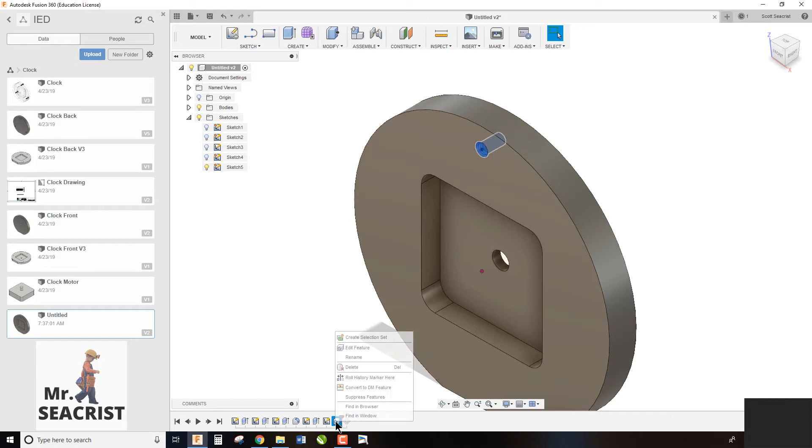So the first thing here is the three holes that go around the center to bolt the clock together. What we want here is actually a countersunk threaded hole. So if you go into here and go edit feature, you want to choose countersink. 0.22 would be the countersink diameter. 82 degrees is fine, and then it needs to be a 12-24 threaded hole to a depth of 0.35

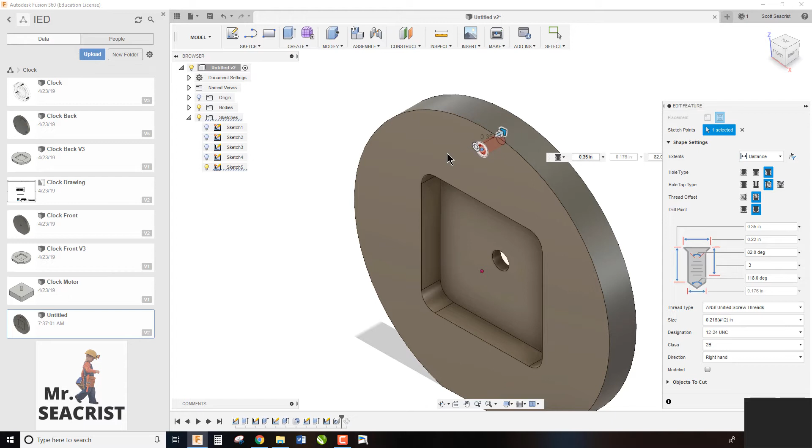deep. And then we want to offset from the bottom to make this 0.3 so that the thread doesn't go all the way down. We want to do that because we need this countersink for an operation on the cam side. So we click OK, and then I just circular pattern that 3 times.

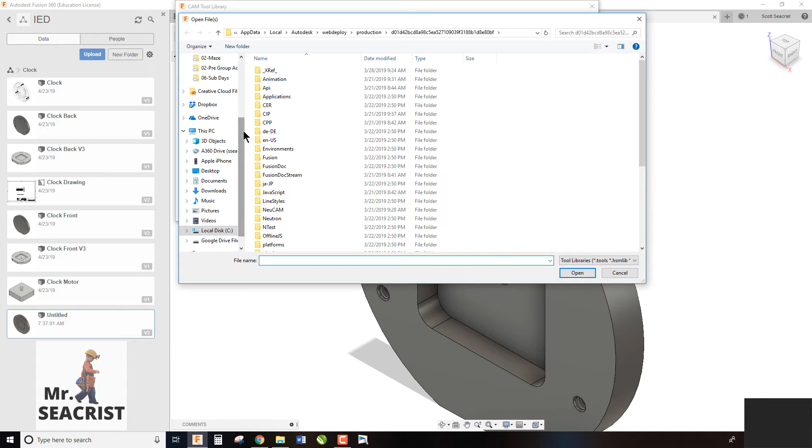So now that we have the model the way we need, switch over to manufacturing. So you're going to have to upload the tool library. Once again, right click, import tool library, go to your downloads, which you'll download this from Schoology. And there's the clock tool library. You'd obviously hit open. I already did it, so I didn't do that.

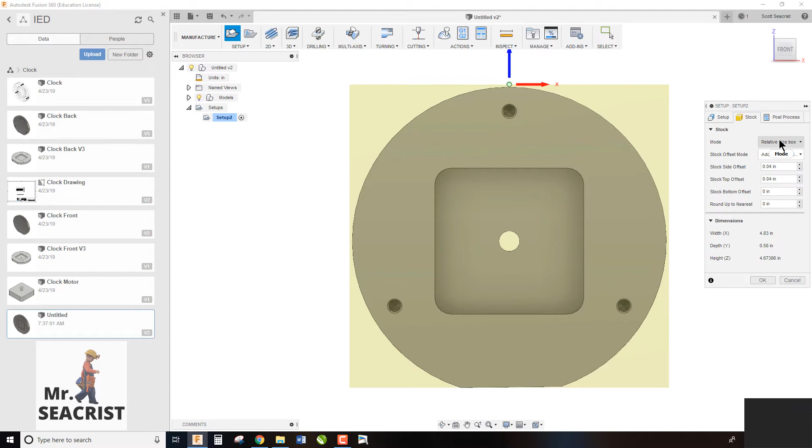So now that we have the tool library, we have to do a setup. So we click setup. Now the clock here is a cylinder to start with. It's a plastic disc. So we need to actually start on the stock side and switch this from a relative size box to a fixed size cylinder. And that fixed size cylinder has a diameter of 4.75 and a height of 0.5.

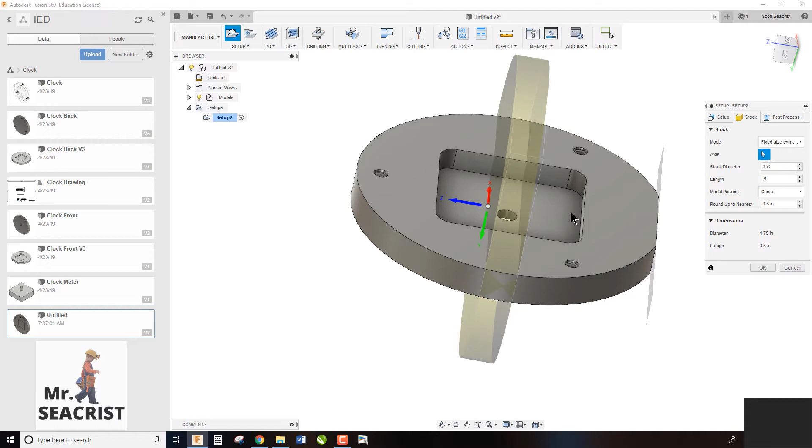Now, obviously, there's our cylinder, but it's not oriented correctly. And then if we click on axis, all we have to do is find one of the circles, either the center bore or the outer bore, and that will now line it up. Now we have the stock right. Now we can go back to setup.

So the origin, the Z, it needs to be located here. It'll probably move on me, but it needs to be located here. The Z needs to be going up. So we're going to choose ZX, select the Z line right there. So now the Z is going up. That's the direction we want it.

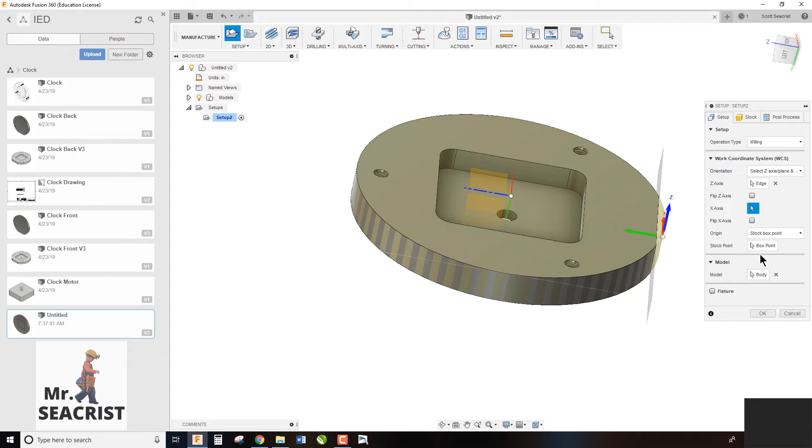The other thing we need is we are going to clamp. The clamp's going to be here and here, holding this disc in place. So we're actually going to machine it on its side. We need this little flat to be off to the right. So we need the red arrow to be pointing at the flat.

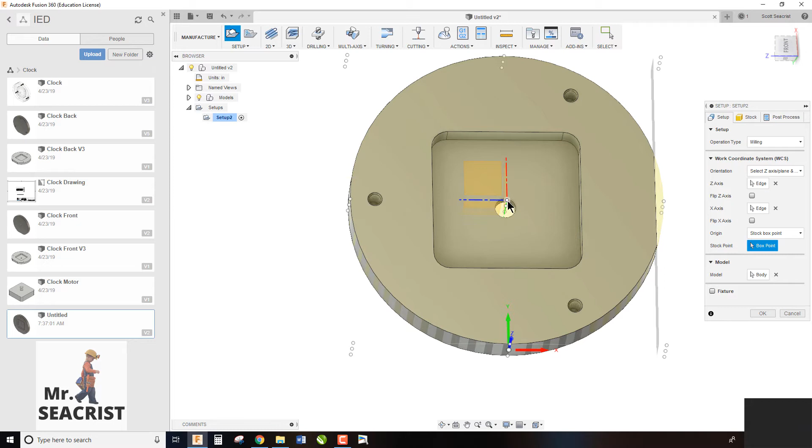So we're going to use the x-axis and select the x-axis. So now we got it in the right orientation, and then I can move it to the point I want. There we go. So we have it on the surface of the part. We have it pointing towards the flat.

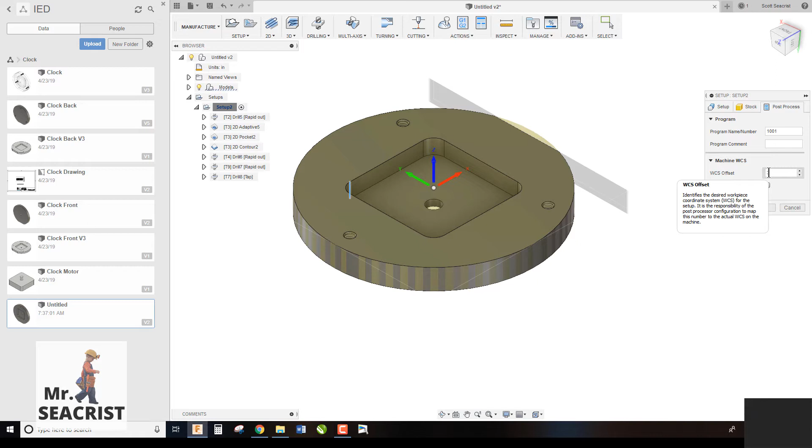Okay, also within the setup tab, we need to go to post processor. And here under WCS offsets, we are going to put in a 3. Now what this should do is give our work offset. It should change it from G54, that's 0, G55 is 1, G56 is 2, to G57 as 3. So this is how we can preset the work offset. So we go ahead and click OK.

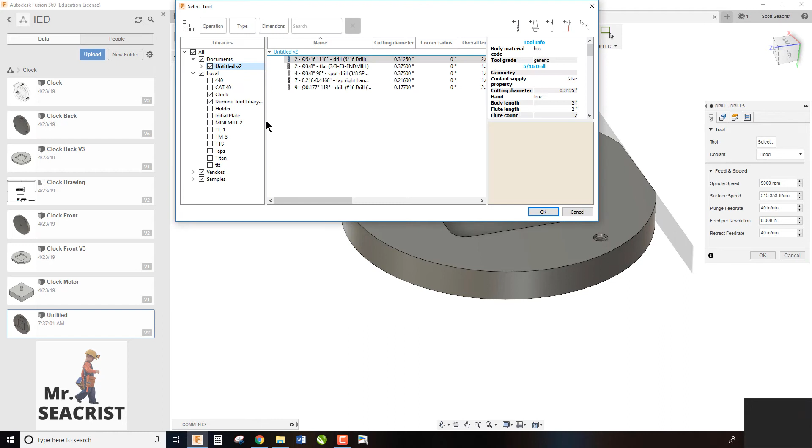First thing we're going to do is we need to drill this hole. If we drill the hole after we machine out the flat, this pocket, it's too thin and it tends to just break out. So what we need to do is drill it first and then machine the pocket. So we're going to go to drill, and from our tool library, we are going to choose the 5/16 drill bit tool, tool number 2.

We are going to then select the bore, and then here we need to make some changes under height. So first off, not top of the hole, we need top of the stock. And second, we need to push the tip through, because if we look right here, you'll notice the tip's not actually drilling all the way through. So if we push the tip through, it is now.

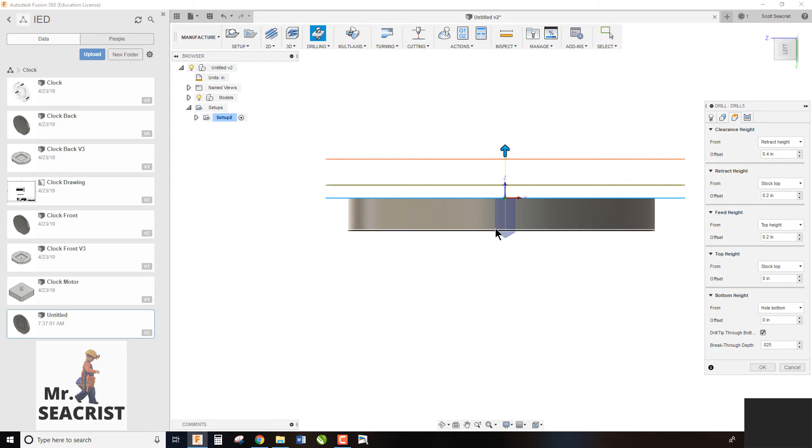And then we are going to add 0.025 just to make sure we get all the way through for any variation there might be in the thickness of the material. So we go ahead and click OK.

And there we go. We now have our hole drilled all the way through. Next we're going to do adaptive clearing to get rid of this material. So let's go to the adaptive clearing. We're going to select the 3/8 end mill, which should be tool number... we're going to have to change these tools. The 3/8 end mill should be tool number 3, I believe. So we're going to click OK.

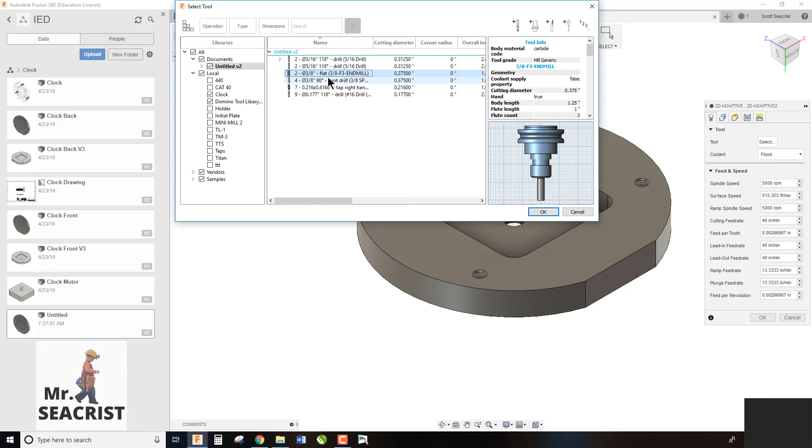So let's go ahead and make that edit. Let's go into the tool library, go to clock, go to the 3/8 end mill and go edit. And this is tool number 3. Okay, so we're going to go 2D adaptive. We're going to go to the tool library. We need to select out of the clock one, and there's our tool number 3. Click OK. We're going to do this surface.

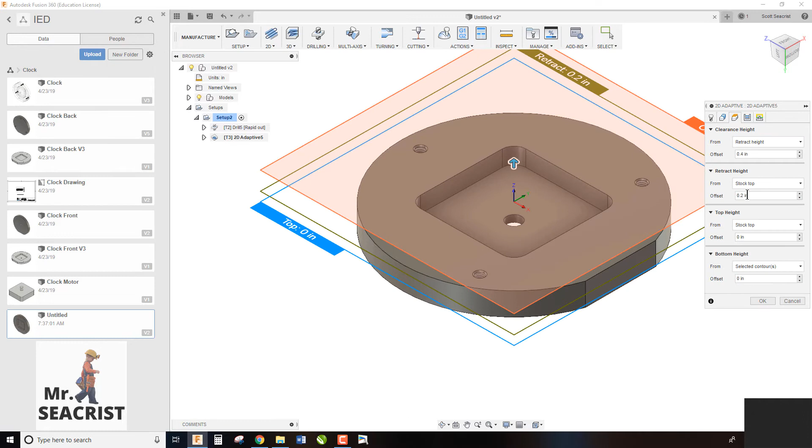None of this changes. The only thing that changes over here is optimal load. We're going to lower that to 0.1 and click OK. And you can see it spirals in and clears out most of the material. Next, we're going to do a 2D pocket here. Same tool, so we already have that. We need to go to passes and turn off stock to leave because we want to cut it to the actual size.

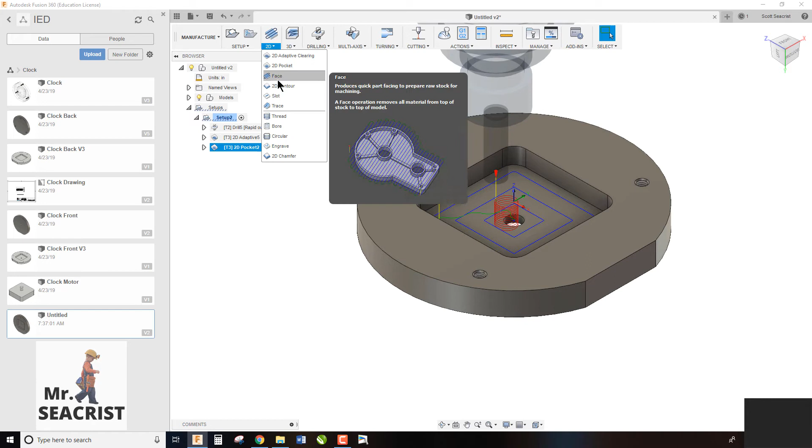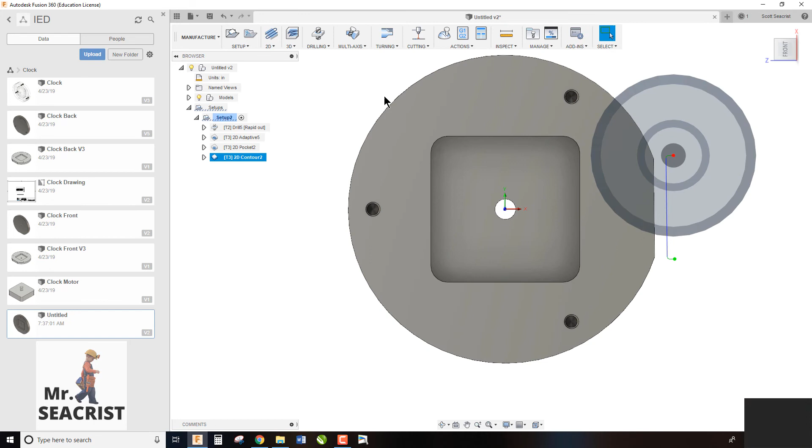And there we go. Now, with the same tool, we want to cut along just that line. So we're going to do a 2D contour. Same tool, so we're going to select this geometry, double click on it, switch to the open geometry and then click add. So now we have just that line. And if we click OK, you'll notice that it just puts this line. We can't cut all the way around the outside because of the jaw of the vise that holds this in place; you'd cut right through it.

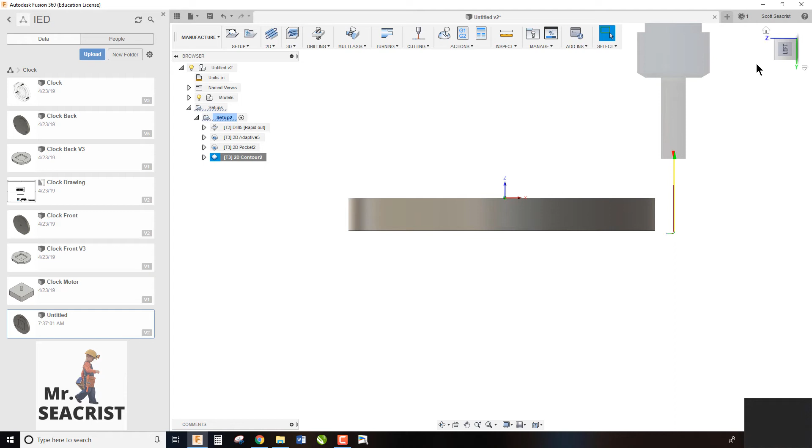I did forget one step on that. So we go into edit. We actually want to push this down like -0.05, so we're cutting with the side of the cutter, not the very edge. The very corner is the weakest part, so we're going to be using this area up here. So we now have that done.

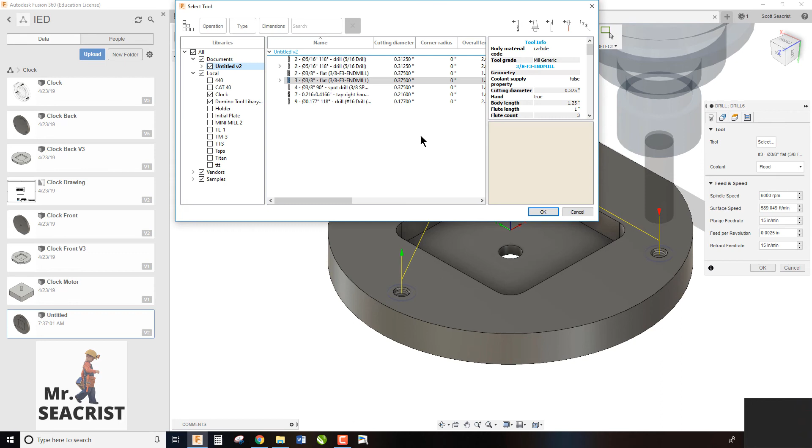And now it's time to put in the holes. These are just going to be 3 drilling commands. For my first drilling command, I'm going to select the cone. I am going to click on same diameters, so it gets me all 3. And then I am going to change the tool to our 3/8 spot drill. And then I am going to click OK.

Then I'm going to do another drilling command. This time my tool is going to be the number 16 drill bit, tool number 9. I am then going to do same diameter and select that surface there. Oops. There we go. So it picked up all the diameters. Nothing changes here, and we click OK.

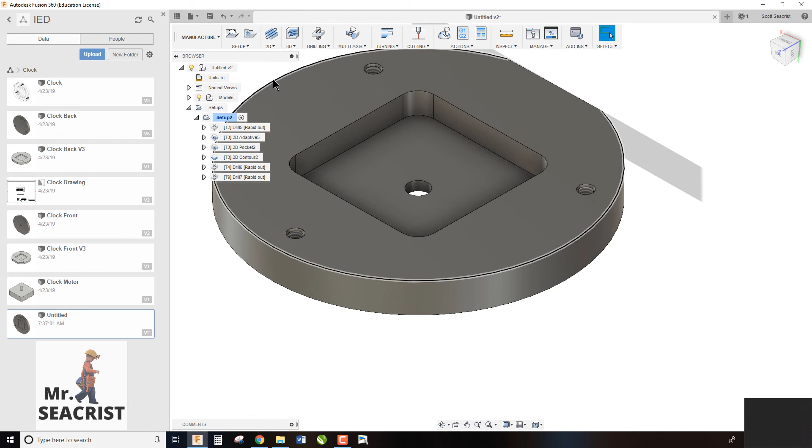Now, the last one is going to be a tapping. So we use drill again. This time we have to select the tapping tool, which is tool number 7. And then we need to come across to geometry, same diameters, select the places. Now, there is one step here. Bottom of the hole, we want to offset it

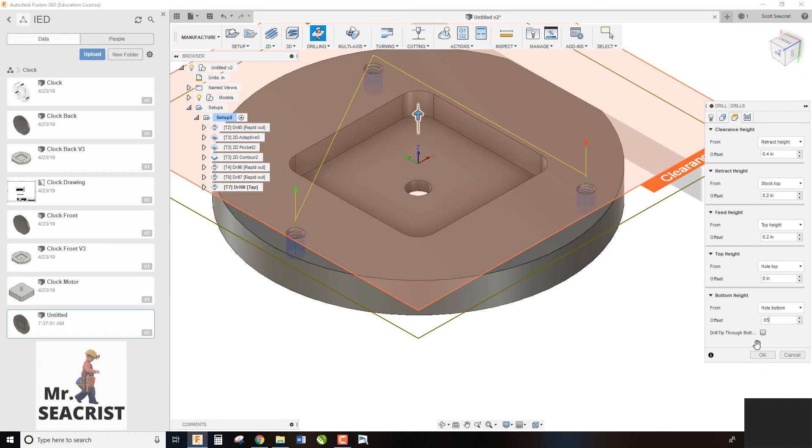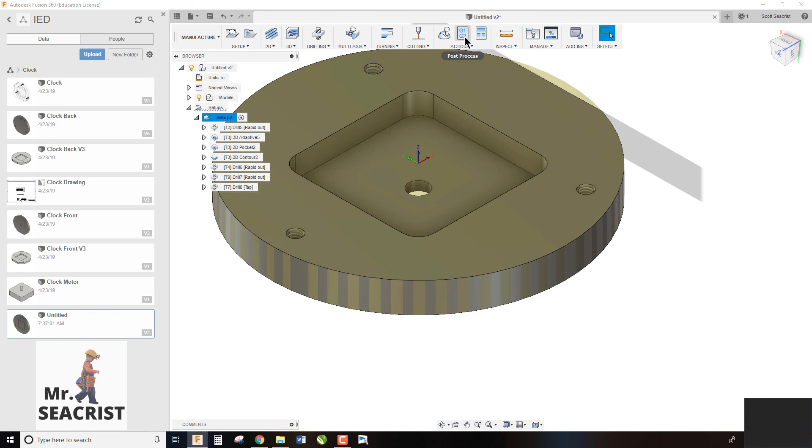0.05. And what that's going to do is, if we look, you can see how far down it's going. And then if we switch to here, we'll notice that it's slightly different, that it's a little bit deeper. So we want it to stop a little bit short. So now that we have it all done, we can go ahead and simulate. Turn on stock, hit play, speed it up a little bit.

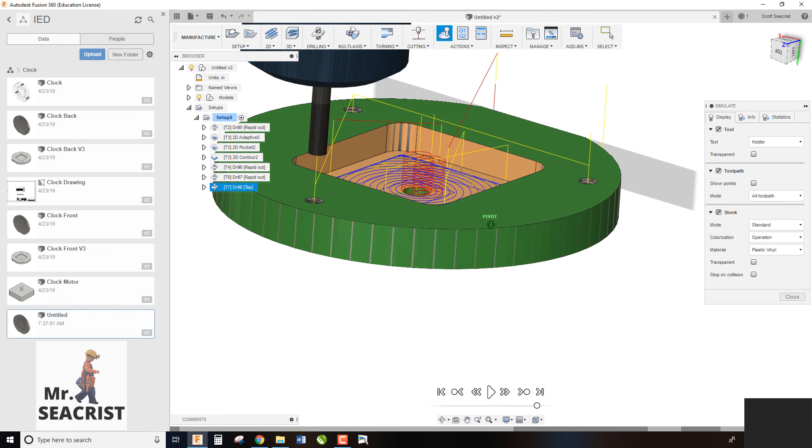And there we go. It went fast through that cut, but we got everything we needed. So now this is done. It's time to post-process. So we hit post-process. We're going to be running this on the Haas pre-NGC controller. We're going to run it on the older machine, so we have to lower this to 200. Once again, you're going to use your student body number. Mine happens to be that.

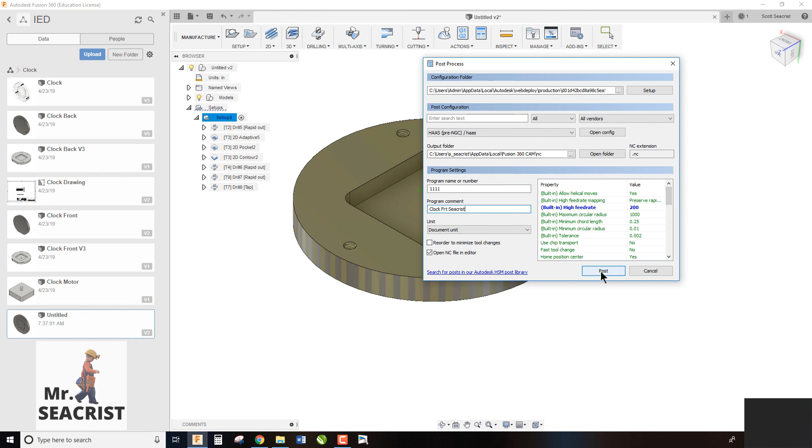And I'm going to use your name: clock, front, can't use periods, and your name. Okay, and once you get that done, we're going to hit post. I'm going to save it to the downloads and hit save. And now we have our clock front code up.

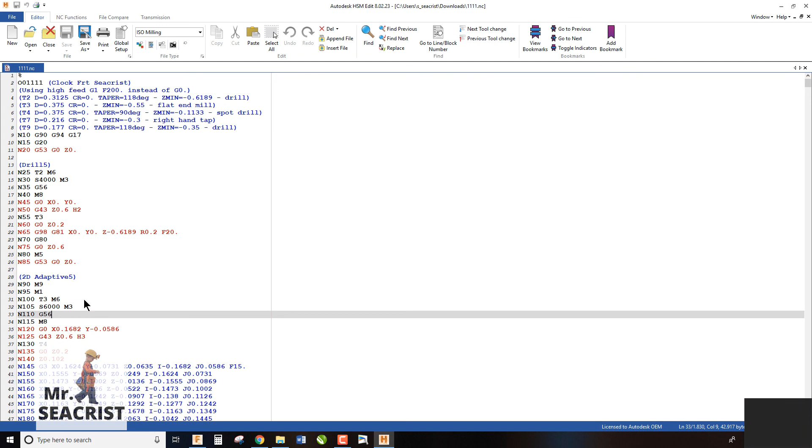And if we look here, oops, I got the numbers off. It works out as G56. That'll be fine, but it automatically puts in G56. So 1 must have been G54, G55 is 2, and G56 is 3. So there are the posts. Now we have it posting out the way we want. And you could take this out and simulate it on the simulators, and then we should be ready to cut it on the TM3.